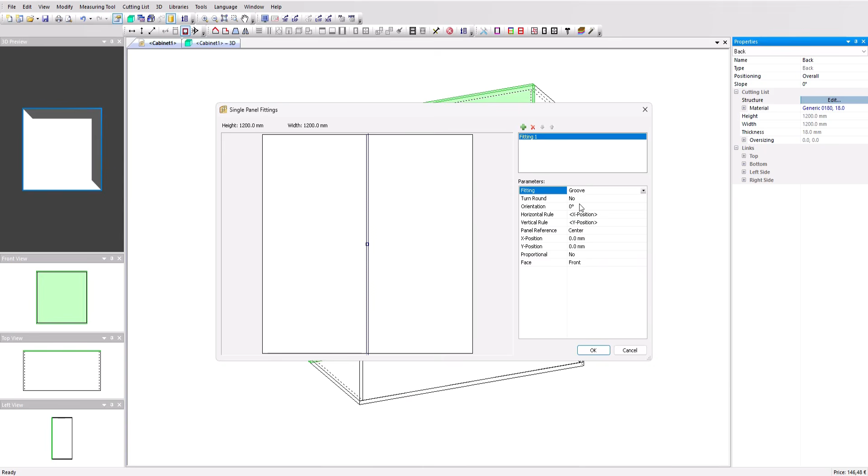Let's have a look at how I've set this up. Just note this is quite a generic setup, and it may be different depending on what you're doing. I've set up a simple groove on face one of my material, added a 10mm width, 5000mm length so it always covers the height of my cabinet, and a depth of 8mm. Additionally, I've set up a tool identifier, and I've called it test line, but of course that can be called whatever you need it to be called.

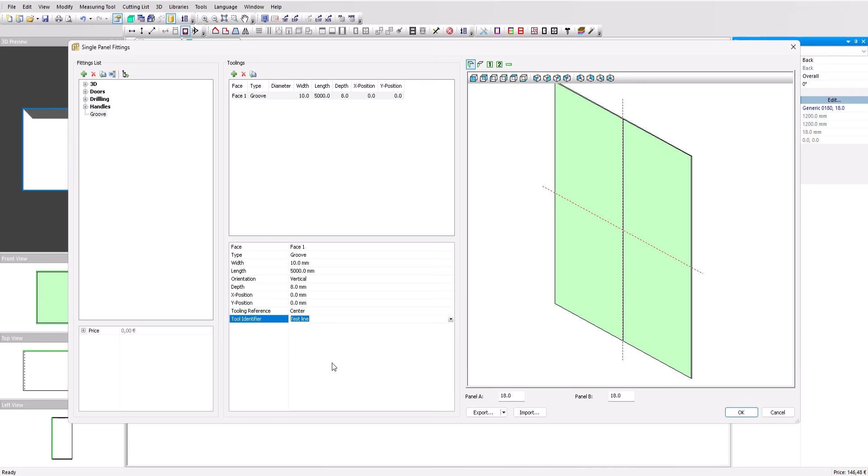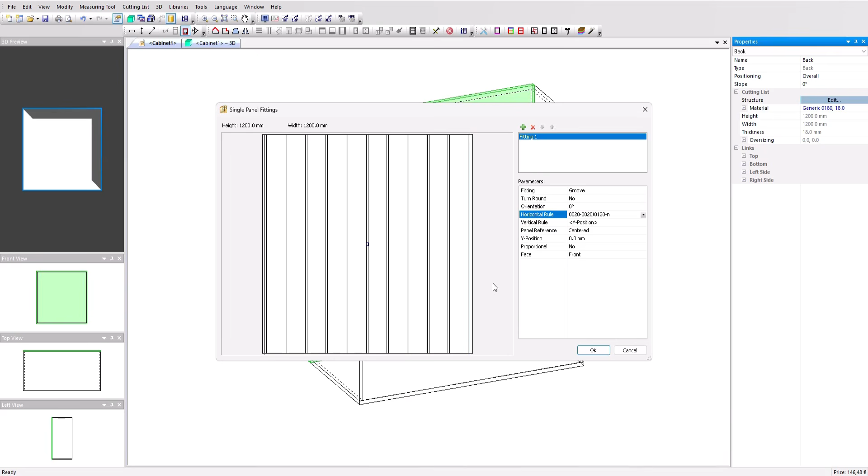I'm going to press OK, and I have that single panel fitting, that groove, now on my panel. Because it's a single panel fitting, I could add a horizontal rule to this as well. So for my example, let's add 20, 20, 120, so we have plenty of them: 20mm from the left and right I have my first groove, then a maximum spacing of 120mm between. But of course, you can set up whatever groove you're going to require. I'm going to press OK.

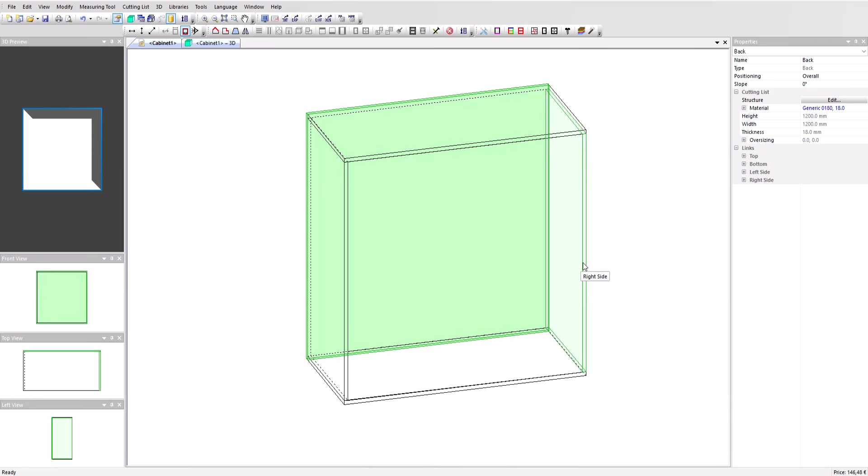I can't view this right here, but if I go into my 3D workspace, I can see this now. Just note, you can save this as a structure. If you go to edit and add the structure to the library, that will apply as a library structure, and you'll be able to use that again as many times as you need. You'll also be able to apply that to a manufacturing method if that's something you would like to do for common use with a single type of cabinet.

To export this to VCarve Pro, I'm just going to come to my post-processor options and go to my DXF post-processor that I'm normally using. I want to add a custom tool here and add that custom tool I'd used before, and I can put in a few parameters for that. Let's just make sure our type of export is set to line for this example. I'm going to press OK and export that now.

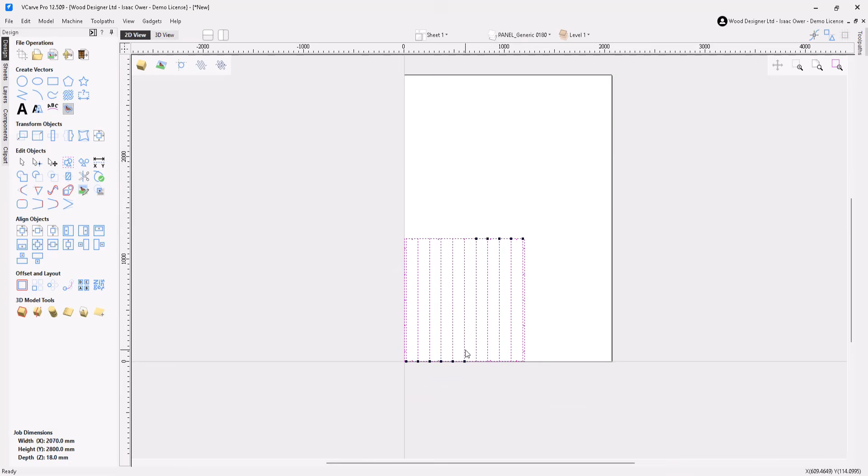Let's send that to my post-processor. I'll save that in a file called cabinet1, and now we can open VCarve Pro. I'm going to import that file, just that back panel, and we should be able to see all of those different lines now on my component, and they have just come through as single lines.

What I'm going to do is set up the cutter I'm using and just run that through the center of that line. So this could be used for toolpath templates, of course. I'm just going to select my layer. There it is. And let's apply a toolpath.

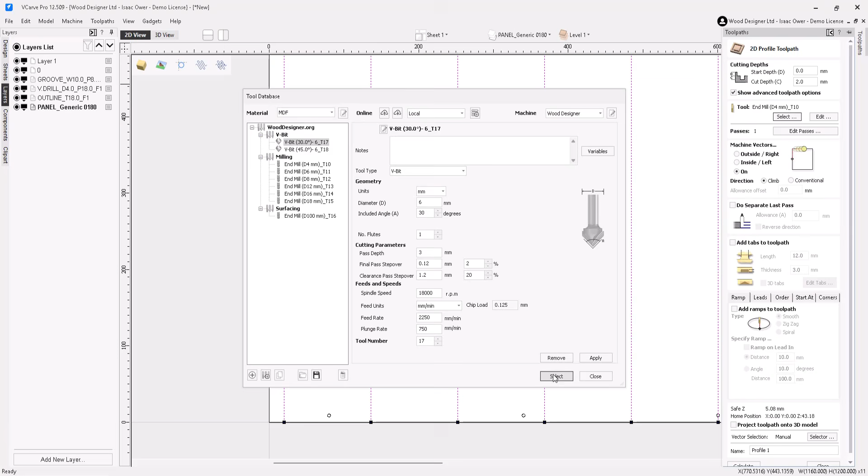Let's apply a milling toolpath. Let's use, do I have an example V cutter? Yes, I do. Let's do this one here. And let's run that tool at maybe 4mm in depth. I want to make sure I'm machining on that line, as that line is the center of the groove I made in PolyBoard, so it's going to make that V-shaped cut for me.

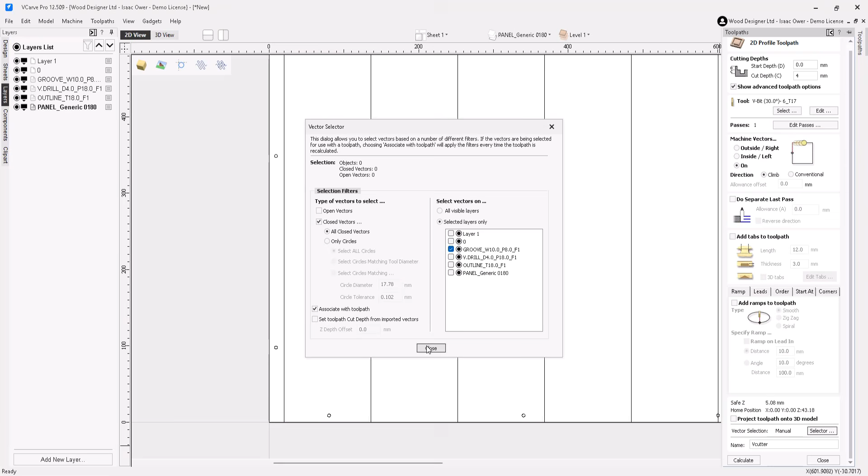So on the line, I'd probably only do a single pass. And then when I'm happy, I can save that. I can add that to a toolpath template. I could name that to be, for example, my V cutter. And let's make sure we associate with the correct toolpath so we can then save it as a toolpath template.

When we're finished, we can calculate that. Select layer vector, calculate. There we go. And I can set that up for machining. So that's how I would set that up.

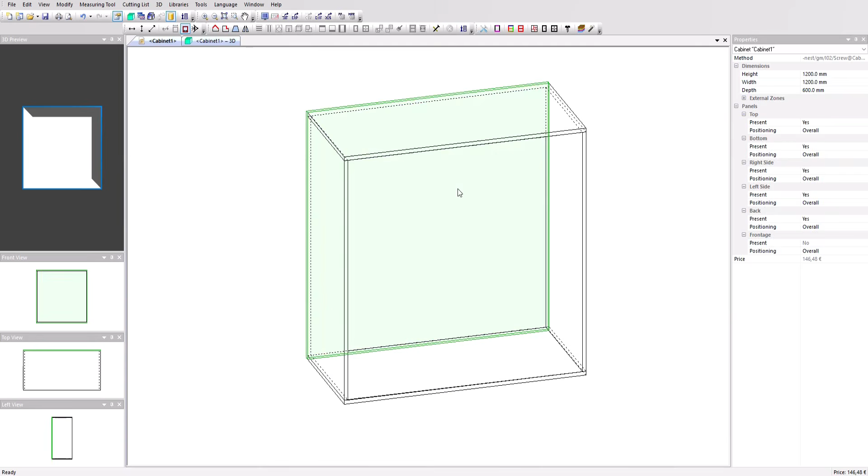There are multiple different ways in PolyBoard, but I find that's the most efficient. And I like that I can save it as a structure in my library and reuse that whenever I need, so I'm not manually having to create that every single time.